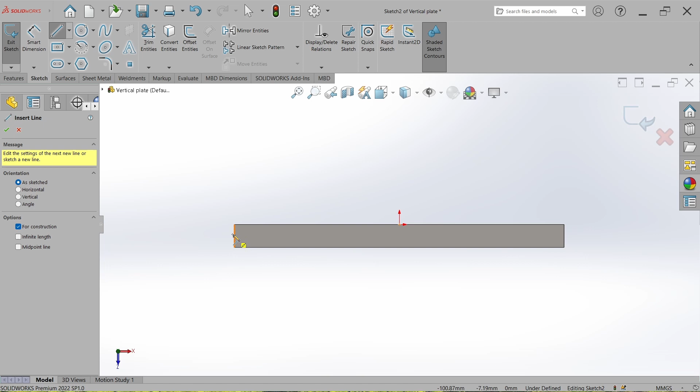Here we want to make the hole at a similar distance from this face and from this face. So what we can do is select the lines and make them equal, and hit OK.

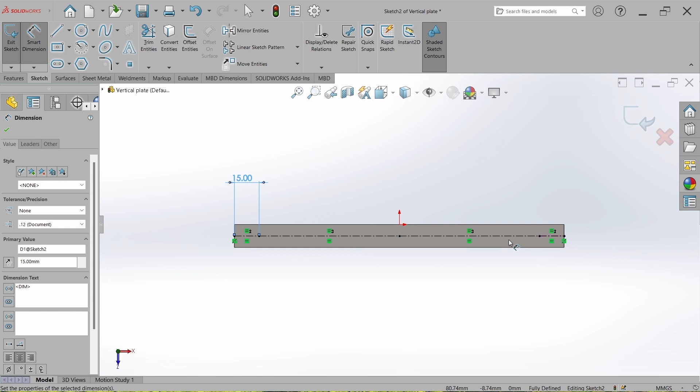Now just close the sketch, go to feature, go to hole wizard, select threaded hole, and select the hole size M6x1.

And if the load is heavy, like 100 kg or 500 kg, then we should go for M10, M12, or even bigger bolt sizes. Just pull this bar, select the end condition blind, set the hole depth to 20 mm, and set the thread depth to 16 mm. It's all up to you, but 16 mm depth of thread is well enough.

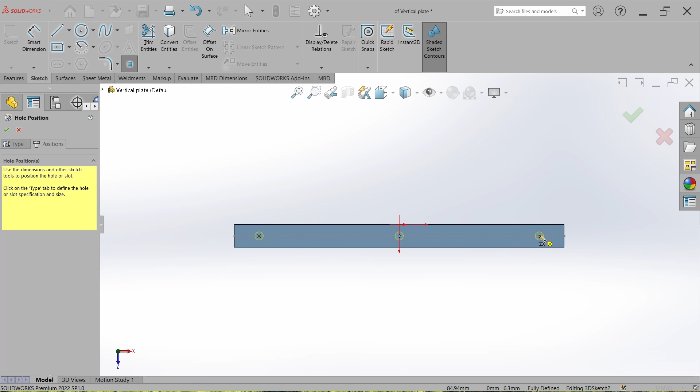Go to position, go to 3D sketch, select the points, and hit OK. Now we have to mount the vertical plate from the bottom side also.

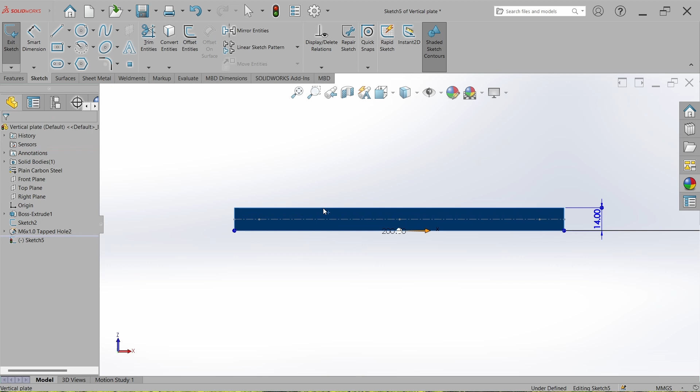So what we can do is make a threaded hole on this face also. Select the face, normal to it, go to sketch, select this face, and go to point, select the point right here. The benefit of this is that when we change the top hole position, the bottom hole position will also change accordingly. Now hit OK, close the sketch, go to feature, go to hole wizard, again go to threaded hole, and everything is set and selected.

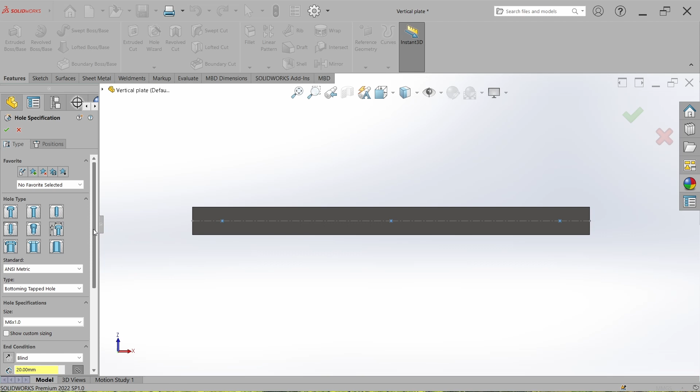So go to position and 3D sketch and just locate the points and hit OK. Now we can hide the sketches, save it, and go back to the assembly.

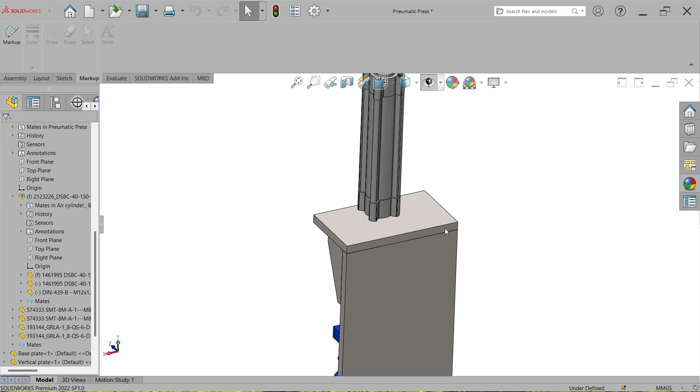Now we have to make the clearance hole on it. So what we can do is select the part, right click on it, select edit part, go to the sketch, select the sketch, and select the top face where we have to make the clearance hole.

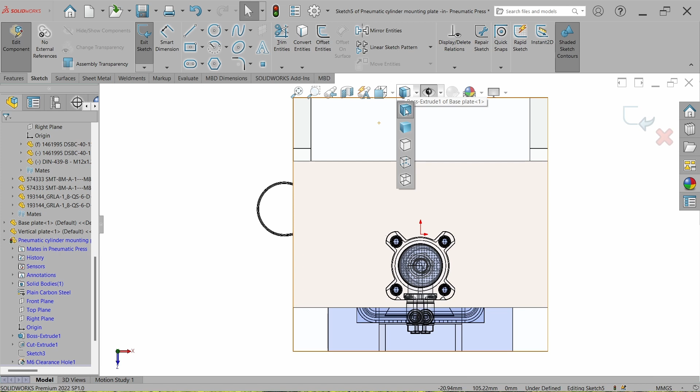Go to vision and select hidden line visible, and now go to line and select the center line. Now just mark the position of the threaded hole so that we can make the clearance hole at the selected position, and now just close the sketch.

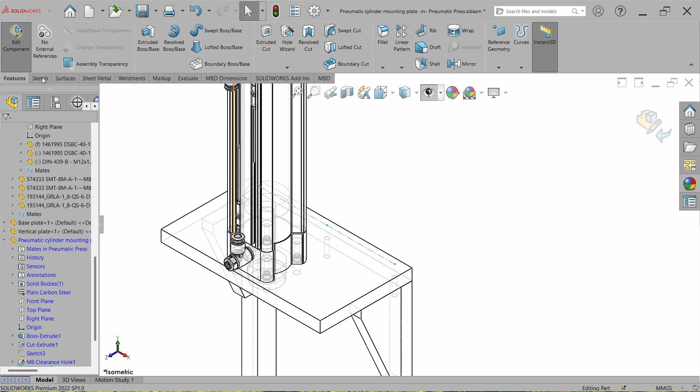Go to feature, go to hole wizard, select hole, go to clearance hole, and select the size of M6, and change the end condition to through all, and go to position 3D sketch.

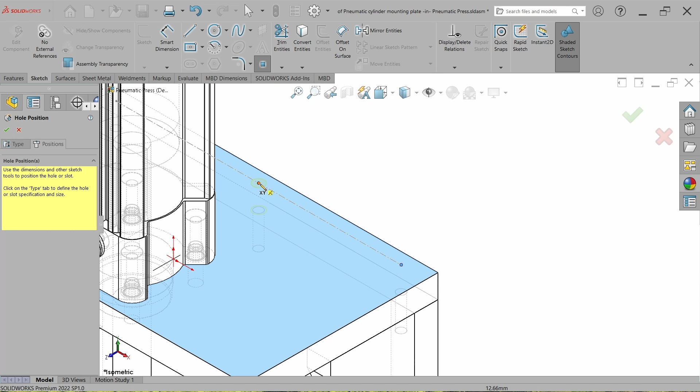Oops, but the lines are not visible, so there's a problem, and the problem is this eye button is checked. So what we can do is just uncheck it, and select the line and select the point, oops, and hit OK.

And now just exit the editing, and now just change the visibility. So there we are. Now we can do the same at the bottom.

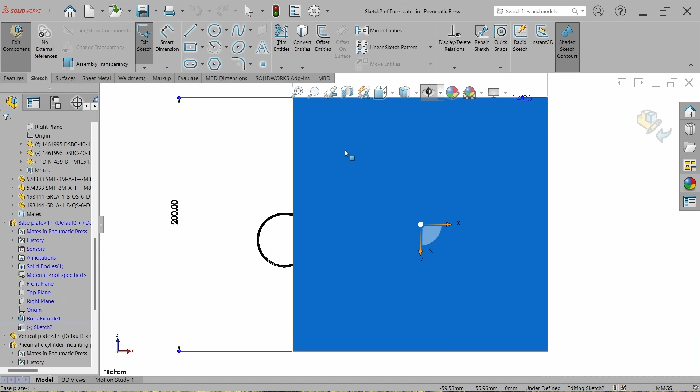So what we have to do is edit the part, go to the sketch, go to feature, and go to hole wizard.

Can we make the clearance hole here also? I will say no, we will have to make a counter bore here. I will let you know why.

Just for now, select counter bore and select socket head cap screw. The socket head cap screw is a machining bolt. Select the size M6 and set it to through all, which is already selected.

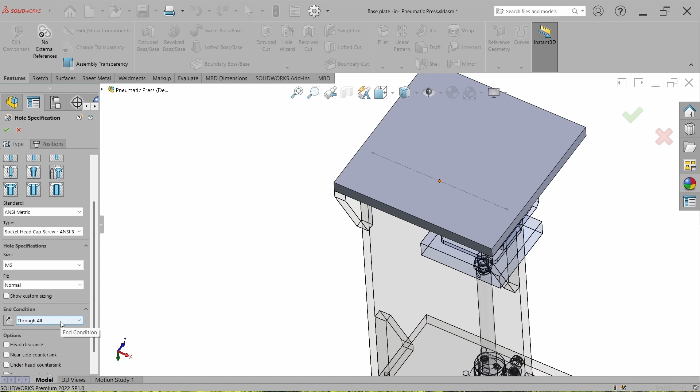Go to position, 3D sketch, and just mark the points, and hit OK.

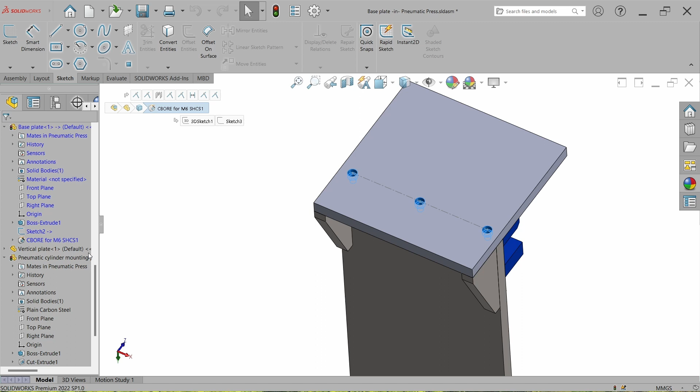Okay, so where should we use the counterbore hole and where should we use the clearance hole. For example, if we made a clearance hole here, what problem would we face? So go to the hole wizard again, change the counterbore hole to the simple hole, select the clearance hole, size M6, and hit OK.

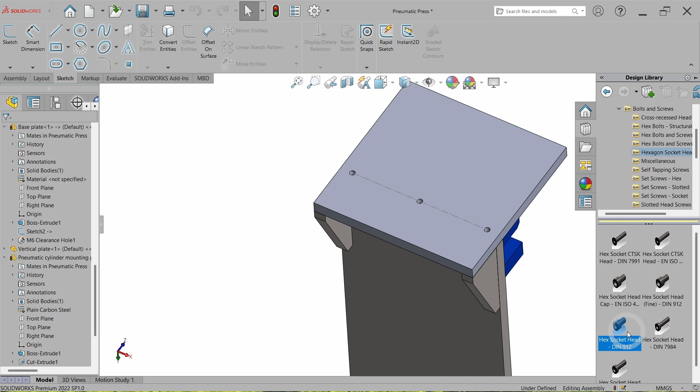Now close the edit component and go to the library, then toolbox, then DIN standard, bolts and screws, hexagonal socket head screw. Select the standard hex head bolt and try to assemble it right here. The size is already selected, and select the length of the bolt as per the thread depth. I'm selecting 16 mm and hit OK, then repeat it.

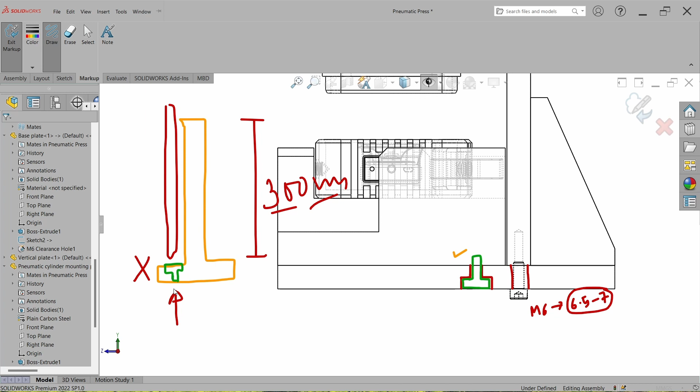Okay, so now we have to mount these ribs into the structures. So what we can do is just open the rib, go to the sketch, and select the faces, something like this.

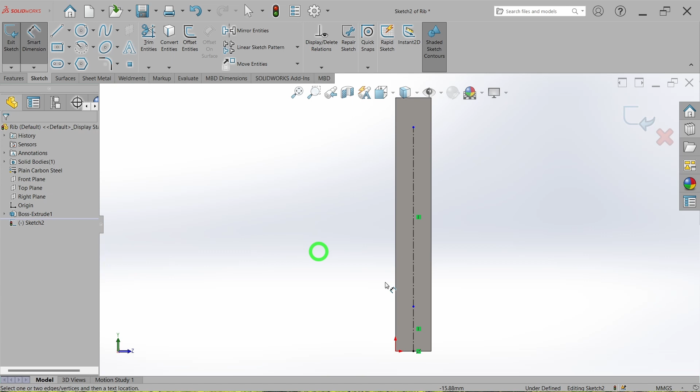And set the distance to 15 mm, and for this side I'm also setting this to 15 mm. This is all up to you.

Just close the sketch and again take the sketch and select this face and sketch it again, starting from the middle point, something like this.

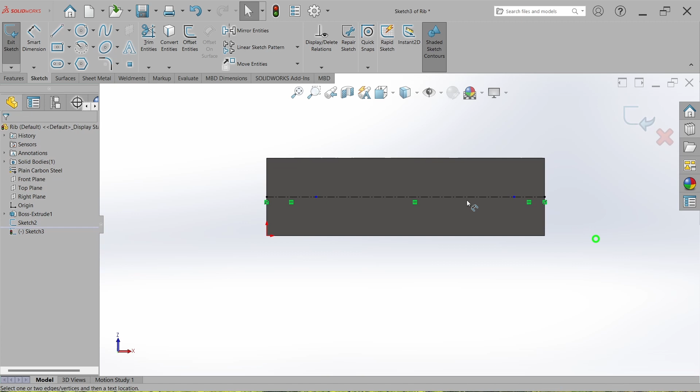Now here set the distance to 15, or you can set it to 10 mm, and here also we can set 10 mm. We will check it later.

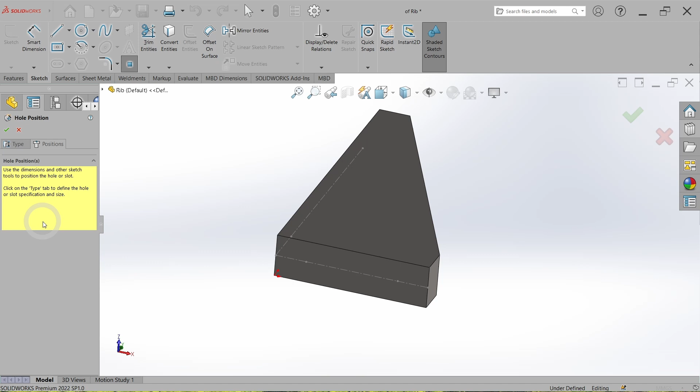Close the sketch and go to the feature, go to the hole wizard, select the tapped hole, select the size M6, and take the position in 3D sketch and make the holes right here.

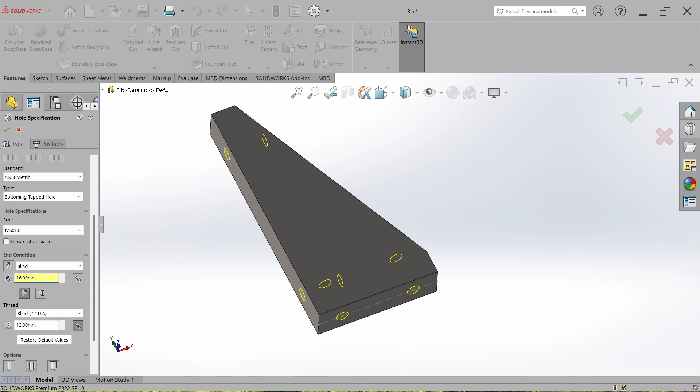Now just go back to the type and go to the end condition and select it to blind, and set the distance to 16 mm, with thread depth of 12 mm.

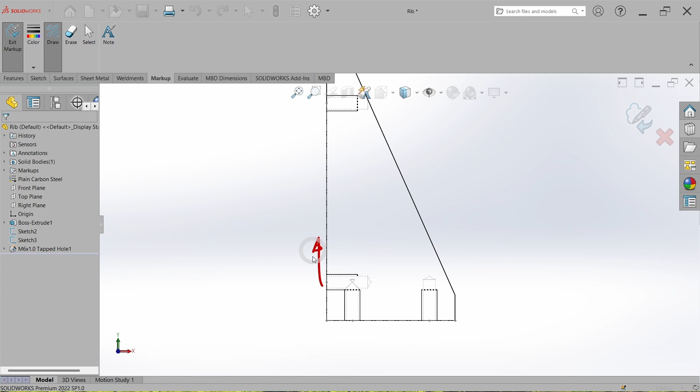So what can we do? We can just move this hole upside. Select the sketch and select the dimension and change it to 20 mm, and let's check it. Now this is fine.

But here this threaded hole is going out, so what we can do is change the dimension from the top and make it 20, and hit OK.

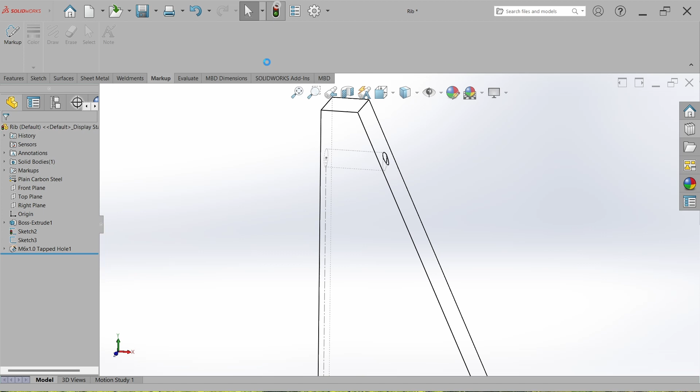Now everything is fine. Just save it, and we can hide the sketches and set the material to plain carbon steel, which is already selected, and close it.

And now we have to make the holes on this plate. So what we can do is just select the part and edit the part. But see, here there are multiple parts, so select only the parts where we have to work.

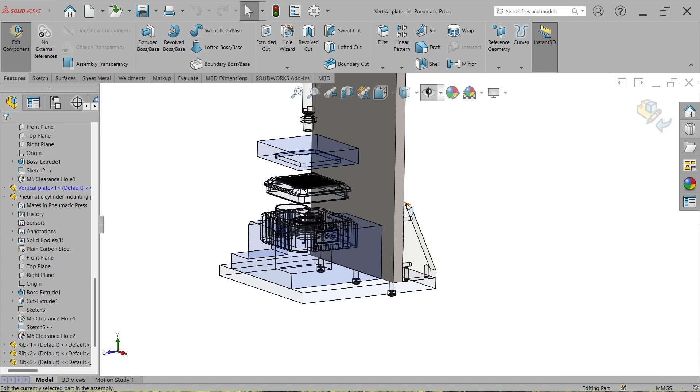Right click and isolate it. So now let's see, the rest of the part has been hidden.

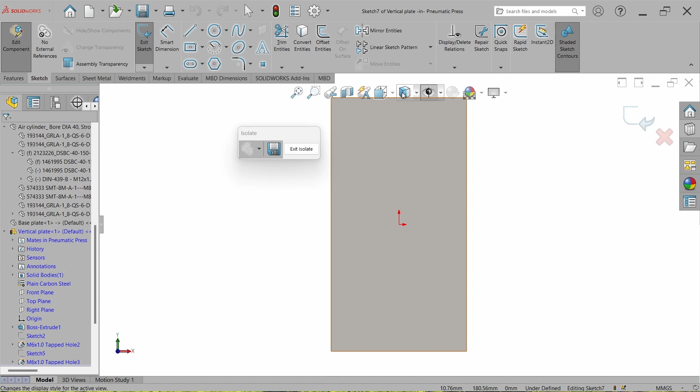Now what we can do is just edit it, go to the sketch and sketch on it, and change the view, and we can just mark the position of the hole. To mark the position of the hole, I prefer to use the centerline. You can use the point also, it's all up to you.

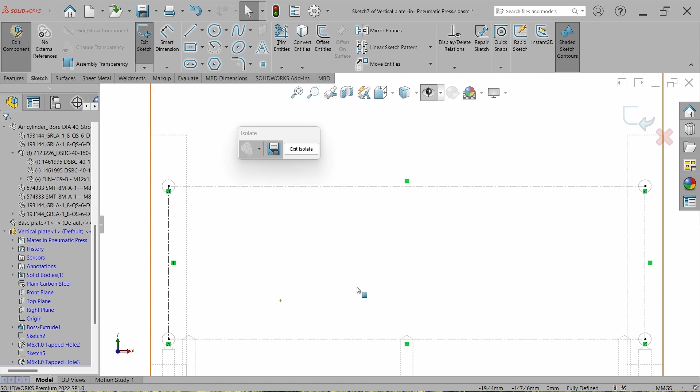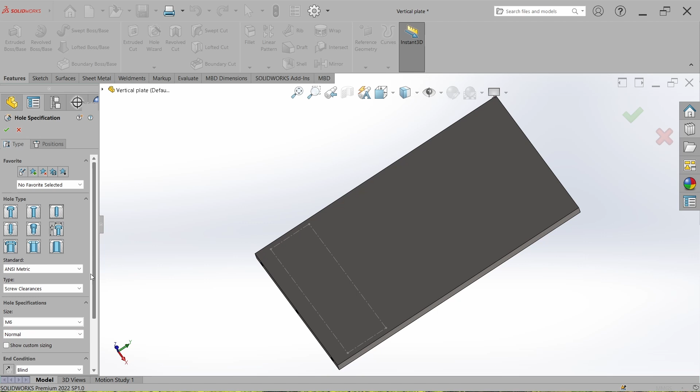I'm using the centerline because if it will be required, we can easily set the dimensions. And now just close it and just open the part, rotate it and go to the feature, go to the hole wizard and select the clearance hole, or you can use counterbore, it's all up to you, and select the size of M6 and set it to through hole and just make the holes right here. Hit OK. Now just check it by making it hidden line and there is no problem.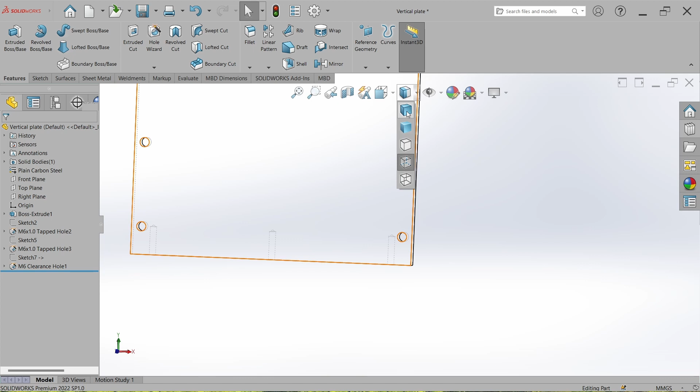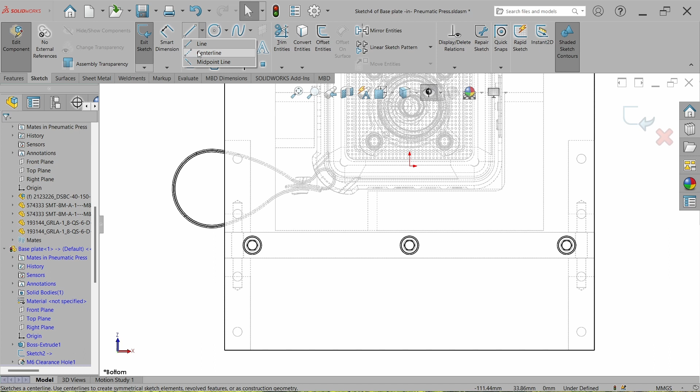Just hide the sketch and go back to the assembly. Now change the view to shaded with edges. And now we have to mount this rib to the base plate. So just edit the part and make it hidden line. Go to the sketch center line and mark the hole positions, something like this. Close the sketch

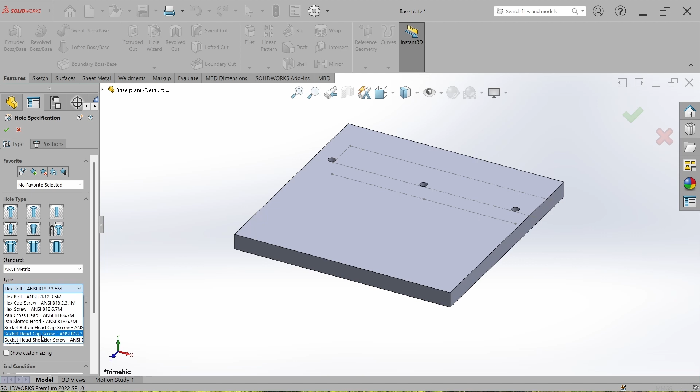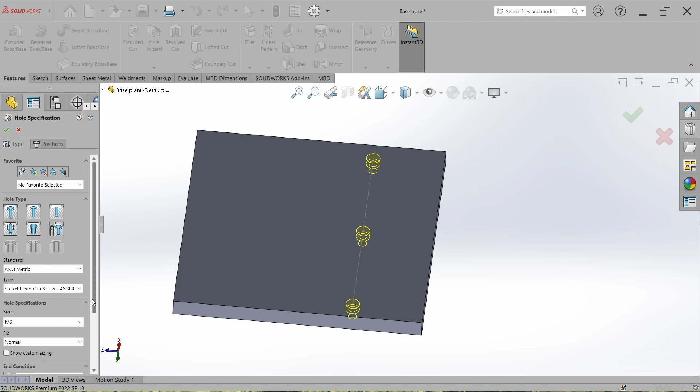and just open it. Go to the feature, go to the hole wizard and select the counterbore and select the socket head cap screw and size is M6 and just make the counterbores right here, something like this. And now just change this clearance hole to the counterbore hole. So select it and here select the counterbore hole and change it to socket head cap screw. Size is already selected and end condition is already set.

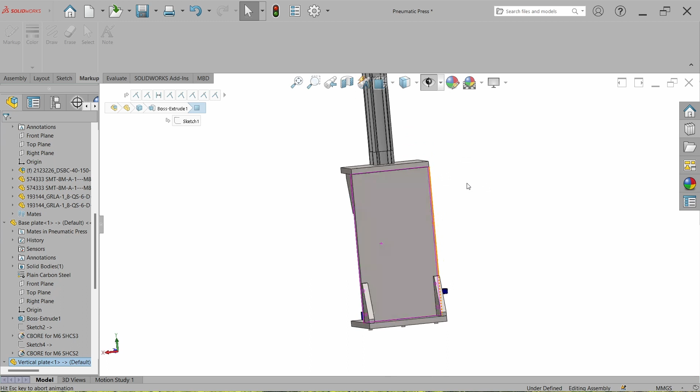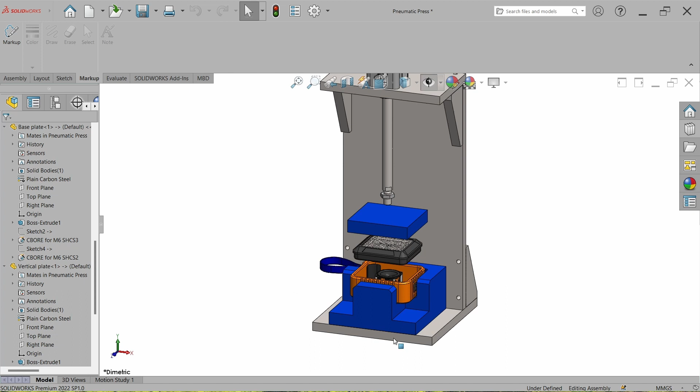Now just save it and we can set the material of mild steel and we can just hide the sketches and go back to the assembly. And now we have to mount this plate to the vertical plate. So just repeat the process. I am putting this on fast forward mode. And now we have to mount this fixture with the base plate. So where should we do the threaded hole and where should we do the simple hole?

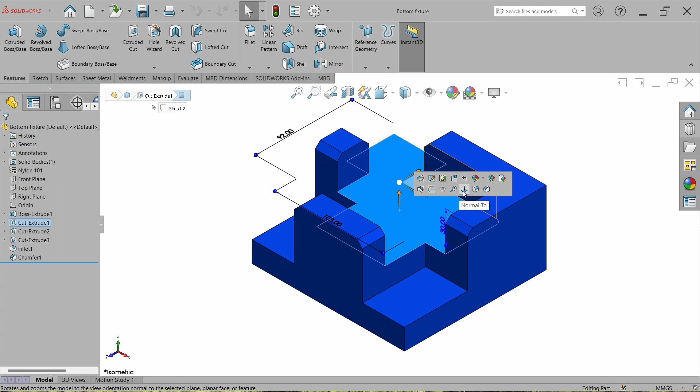So what we can do, threaded hole in the base plate and simple hole in the fixture. So just open the fixture and take it to top view, and here you can use 2 bolts or 4 bolts, it's all up to you, but just for simplicity I'm going to use 2 bolts right here. So just go to the sketch, select the face and make the hole right here, but it will be better to make the hole vertically.

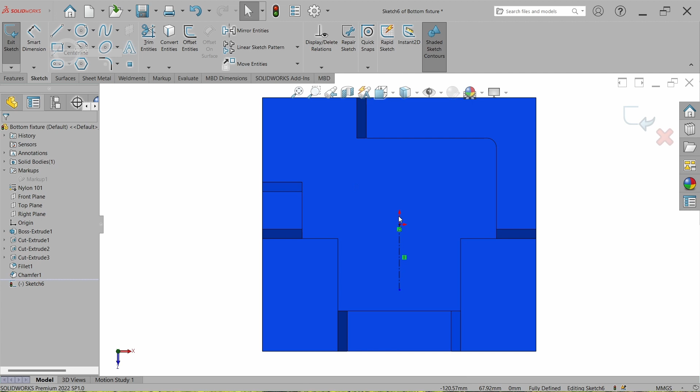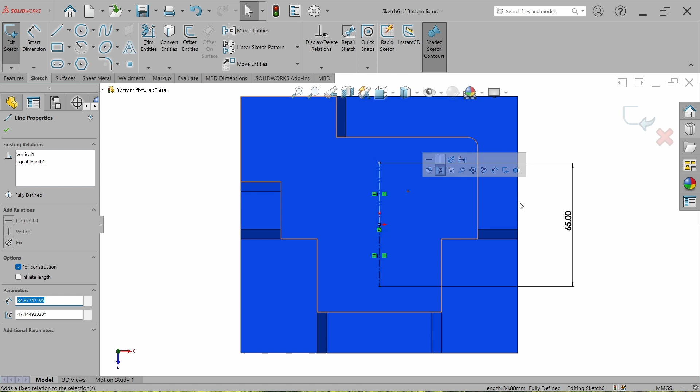So because there is a space, again make one more center line, and select those 2 lines and make them equal. Hit OK. Go to the smart dimension and select the gap of 65 mm. Oops, just make it vertically constrained, and this is all up to you. And now just close it, go to the feature, go to the hole wizard and select the counterbore of size M6, and position it right here,

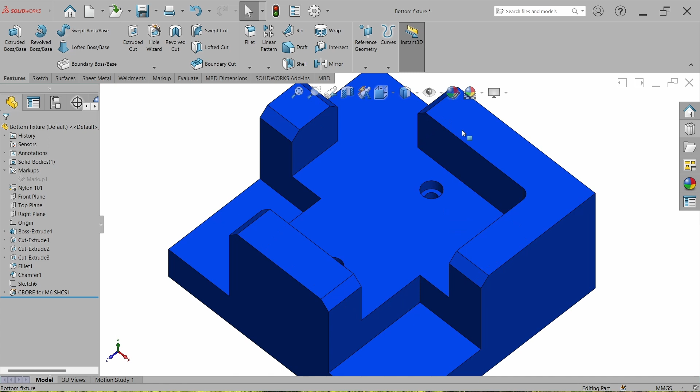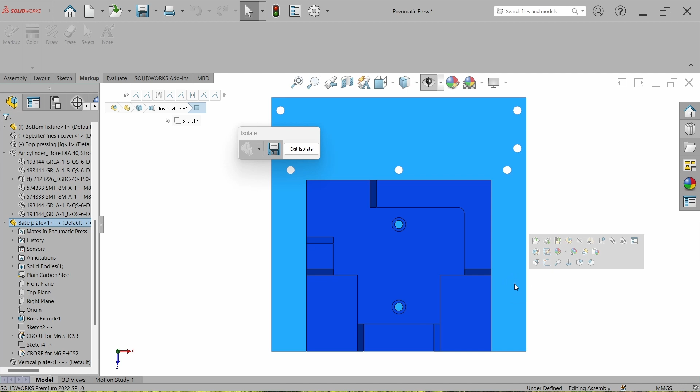Now just close it and select the fixture, press and hold the control button and select the bottom plate and right click on it and isolate it. And now just take it to top view and select the bottom plate and go to edit part, go to the sketch, select the center line and make the sketch on it and select the hole positions. Oops, something like this.

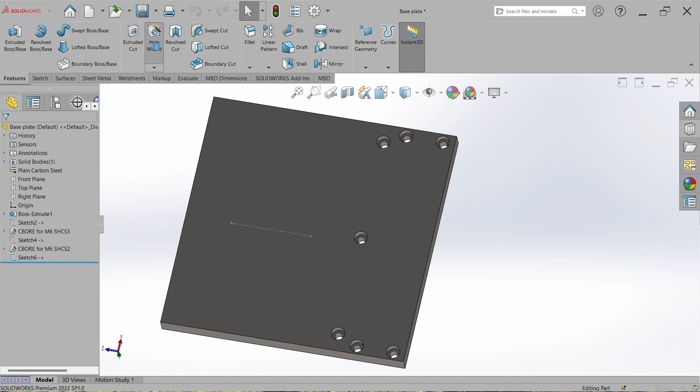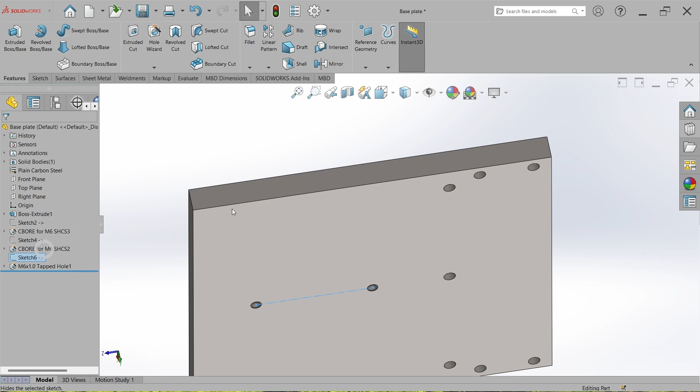Now just open the base plate and go to the feature, go to the hole wizard and select the threaded hole, and the size of M6 is already selected. Now just mark the hole positions right here and somewhere here and hit OK and hide the sketch. Go back to the assembly and exit it. And now we have done all the threaded holes, clearance holes and counterbore holes. Now we just have to delete the temporary mates and constrain them as they should be.

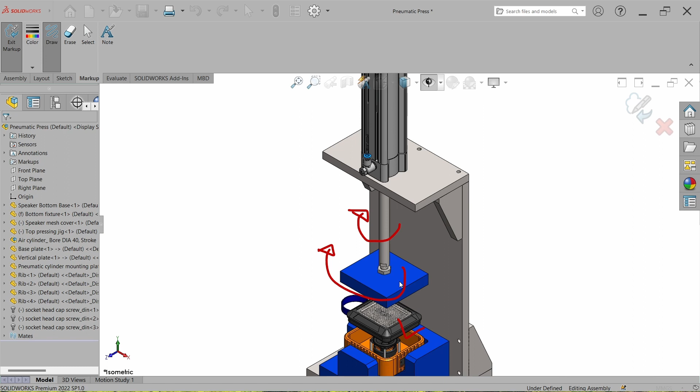We can provide a guide to the pressing plate and then we will connect it with the pneumatic cylinder.